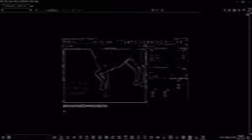So what is Houdini? Houdini is a very powerful, mind-blowing software, and it's popular, it's been around for a long time, and every time they're stepping up their game and improving the program. It's for 3D modeling, animation, visual effects, and compositing, so it's the complete package. When you jump into it, you could stay there forever because it's huge and has a daunting interface, but it's pretty easy to get around. We will get through all this. This is not scary at all.

For the new guys, let's jump into the Houdini website so we see a little bit about what Houdini is. By the way, since we are here, I want to tell the new guys that don't have Houdini to get the free copy, The Apprentice. The Apprentice is cool, all right?

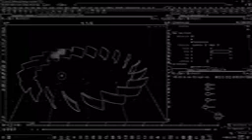Okay so we are back. As you can see, Houdini can do a lot, for film, for game, basically everything. So if you learn Houdini, not just for the fun of it, you can make money too.

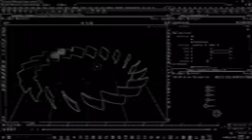The only thing that makes Houdini different from other programs is that Houdini goes through a node network system, which is very simple and not scary at all. In most other programs, you create something, it lands in the viewport, and then you make changes there. But in Houdini, we have a node network.

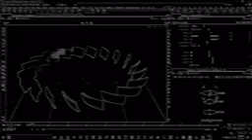For example, when you first create an object, let's say this sphere is the first thing we created to make this stuff. We can come back here and show it. So in the beginning, it was a sphere, this is what we created, and then we can go down to the last stuff we have done. So this is where we are right now.

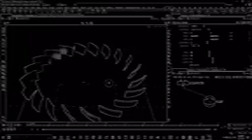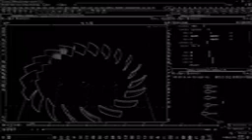You see this jump around we are doing right now? You can go to the beginning and then to the end. This jump around, in other programs, you have to use Control Z, undo something like that, to change or go back to where you were last time. We all know Control Z. In Houdini, you can also do Control Z if you want, but it's very cool to see the stuff in front of you because you can jump into any part of your work, any part of it. It's like the steps you've been taking.

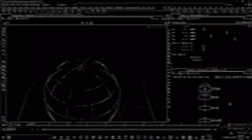I can go back to this curve and still make changes to it. You see, make changes to what this curve is doing to the sphere, which is cool. These changes that we could do right now make it powerful to work inside Houdini.

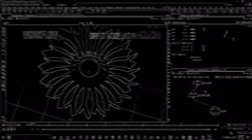So this course is going to show you all this stuff, how we call the nodes, how we use the network and everything. But we are now going to create visual effects like this. In this course, we will model this bike. This bike has a lot going on.

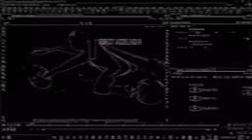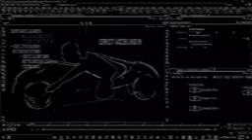The bike itself is low poly, or low res. The helmet here, we have two helmets. This one right here is hard surface, or high res, which means a lot of polygons. You don't want to have this amount of polygons on an object if you are building an Android game, because the system has to calculate all these polygons and it will affect the performance. So we get a chance to learn how to model cool stuff while still keeping it low poly, and if we are working on a project where we don't care, we can have cool hard surface objects too.

We'll have the chance to go through the character. We will design all the clothes, the design on it. We will work through the skeleton, how we pose it and everything. So it's a lot to cover. And the question is, so what is direct modeling?

Let's jump to Maya. So we have an empty scene in Maya right now. Let's drop a sphere.

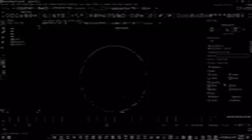To work on the polygons, we right click and go for face, then pick a polygon. What do we want to do? The tools are here, we want to call extrude. We pulled it out, okay. Let's do it again, let's call extrude and pull it. This is direct modeling.

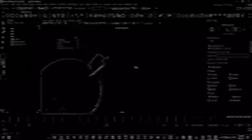If we messed up, we want to do it again. Control Z, and we go back to where we were. So we will lose all the stuff here, and then we will do it again.

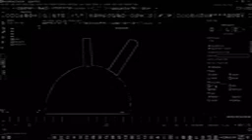Extrude, right? We have two segments. So this is direct modeling. You don't care when you mess up, you jump back and do it again. We could select this polygon, call poly extrude, and extrude it. So if we have a design in our head, we just follow that design or try to create it. That is direct modeling, right?

So let's jump back to Houdini and let's do the same thing. Okay. In Houdini we have three windows: the perspective viewport, properties, and the network.

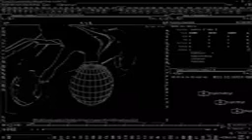So let's create a sphere. Let's drop it right here. Okay, we have it, it's here. When you create, it lands on the object level. What do we want to do? We want to work on it, so we double click on it. We are inside the geometry now. We can work on it.

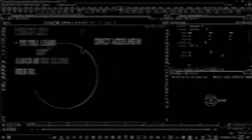Let's do the same performance we did in Maya. Let's try to extrude things out. So get out from the system, go to polygons, you will select it from here. We have the polygon here. Select the polygon. Before that, let's give this a nice shade. Cool, so we have this cool shade. Let's select these polygons, call for C on your keyboard, and extrude it out, the same.

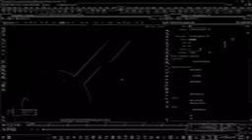Okay, for the next extrusion we can even close this network, you don't have to look at it. We call the poly extrude and pull it out. This is direct modeling, this is what we were just doing in Maya. I get out from the system, I select this polygon, I call for poly extrude again, I pull it. Direct - we use the same principle.

So let's get rid of the sphere. That is the direct modeling we're going to do.

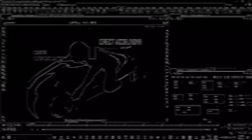How is the course breakdown? We're not going to have a specific topic, like maybe working on Boolean, because we are working on all the tools and there's a lot of them. If we just talk about a single tool at a time, that's just basics for learning Houdini - we are not doing that. We are modeling, but I will try to embed, as we go, learning all the tools. I'll get into the details, that's why the course gets longer. And if we are modeling the front part and the class is getting longer, we'll have part 1 and part 2, right?

Can you make money when you finish this course? Of course, yes. So let me show you something I have at Unity Asset Store - I modeled these objects. I had a guy contact me who needed models for simulation, warehouse environment simulation. I created it, so I decided to have this for people that need it too. And it's very cool, you can create all this stuff and make money out of it.

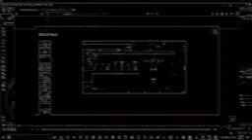If you have another knowledge like programming, like this one, I built an interface in the Unity editor so I'm able to create characters within the editor - a black guy, a white guy, give them different clothes. It's very cool, so there is no limit to what you can do when you have these modeling skills. You can even get further.

I have more, but let me show you this last one. If you want to work on stuff like this, animation, you have to go through modeling. So for example here, I have this animation going on at Unity. Let me show you something small that is related to what we're going to do. If we look at these characters, the faces - you see it's similar to the bike, the rider we have. So let me pause it.

You can see that all these designs on them, it's extrusions that we're going to learn - it's the same principle, the shading and everything. So we will learn all these skills, and after the course you should be able to apply what you know with these modeling skills and create something and make money. So it's not just for fun, it will help you make money. That is what this course is about.

But what I want to say before we get out of this class is: when you are learning, it's not about the step-by-step thing that you have to know. This is very important - it's not about the step-by-step things you have to know. You have to understand the core thing the program, or whatever you are learning, is about - how it operates, the workflow. This is very important. When you understand the concept, the workflow, applying all the tools is the same. So when I teach you even just one tool and you understand the network, that's it - you can call all the tools and use the same principle. That is what this course is about.